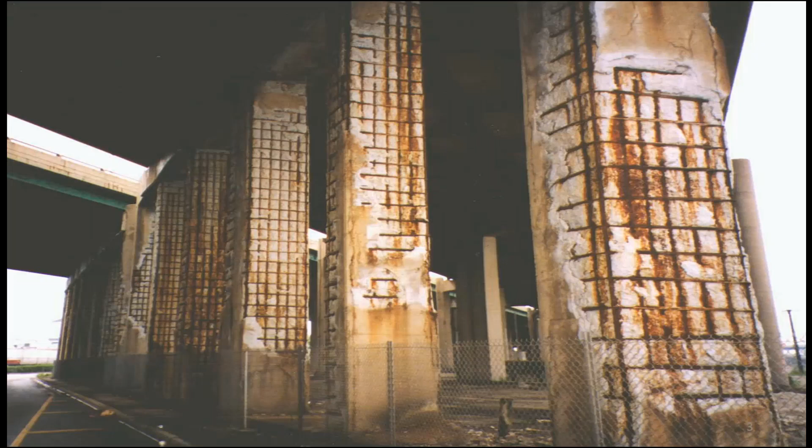So with that, we'll get going. I thought I'd start by showing a picture of a bridge. There are a lot of structures out there which suffer from deterioration, and very often those structures end up being demolished and replaced. That may not be the most beneficial option for either the owner, the traveling public, or society as a whole, but that does happen quite a bit.

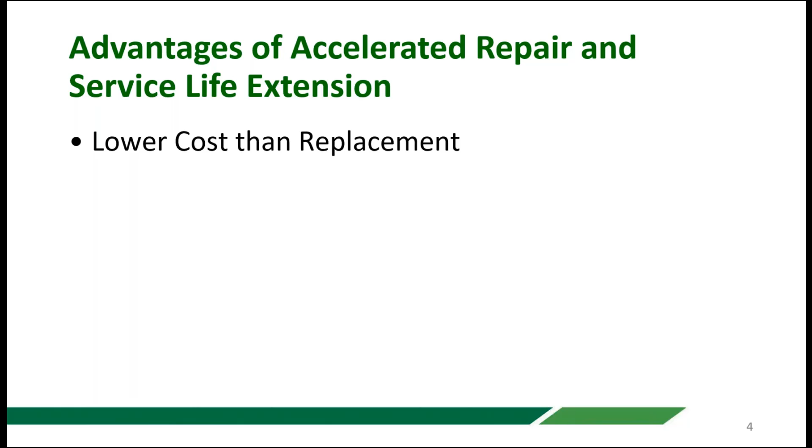There are a lot of advantages of accelerated repair and service life extension. This is not an inclusive list, but generally this is lower cost than replacement—if not, then probably you should do replacement. Generally it's faster than replacement. Generally there's much less impact on traffic and you have improved work zone safety. Often you have reduced environmental permitting, and you certainly use less material and as a result have a lower environmental impact. Finally, all of these things lead to improved public relations, and hopefully not only is the public happy, but so is the owner, contractor, and everyone else.

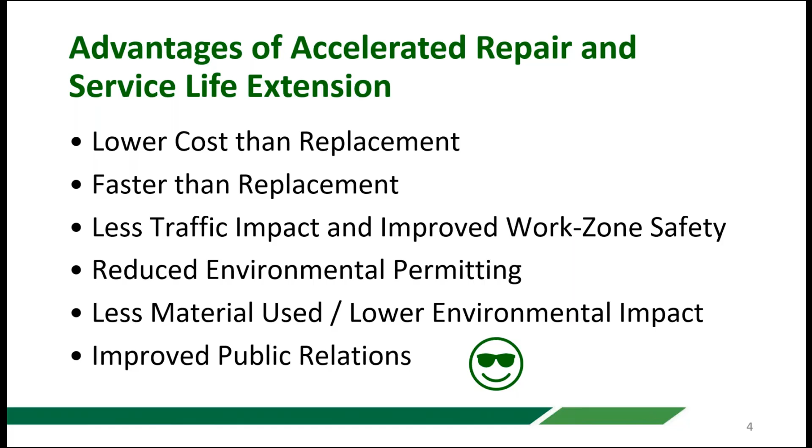In order to do this, however, we need to be able to do repairs that last. There are a lot of repairs out there that are done that are maybe not done very well, and as a result, they don't last. If you're counting on the repair to last, doing it poorly or not doing the proper things in order to make a durable repair is not good.

So this is a picture of a beam end on a bridge by a leaking joint, and you can see they've done some repairs. They haven't done many of the things that should be done in terms of detailing of the repairs, and the repair is obviously failing, very often after a short period of time.

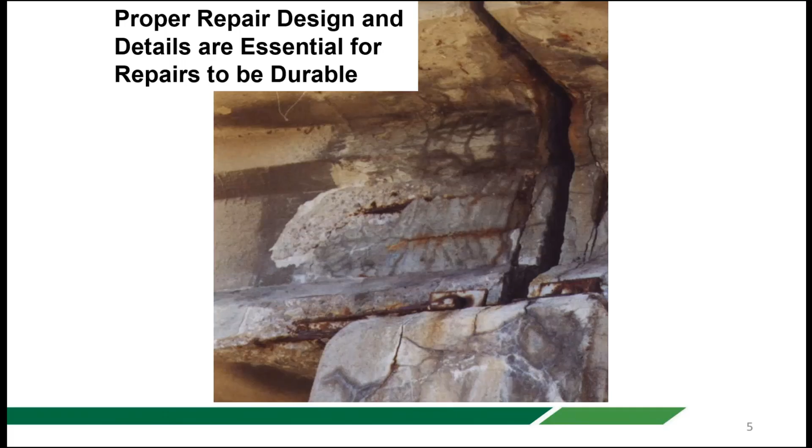There are organizations out there like the International Concrete Repair Institute, which produces and has available a number of different guidelines and procedures for doing different types of concrete repair steps. This document is specifically related to how to do proper concrete repairs. ICRI, the International Concrete Repair Institute, is part of the National Concrete Bridge Council, so you can access a bunch of their documents.

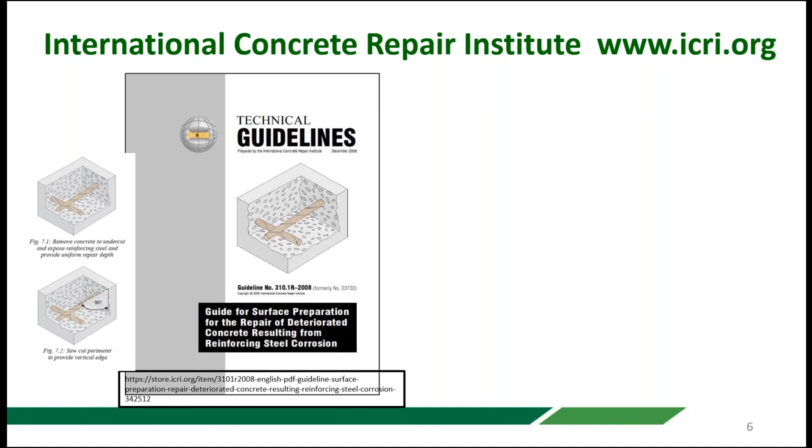In this document, for example, it talks about how you should have square cut edges, chip in behind the reinforcing steel, and a number of other things in terms of surface preparation and getting a nice, clean, rough, sound surface to bond to.

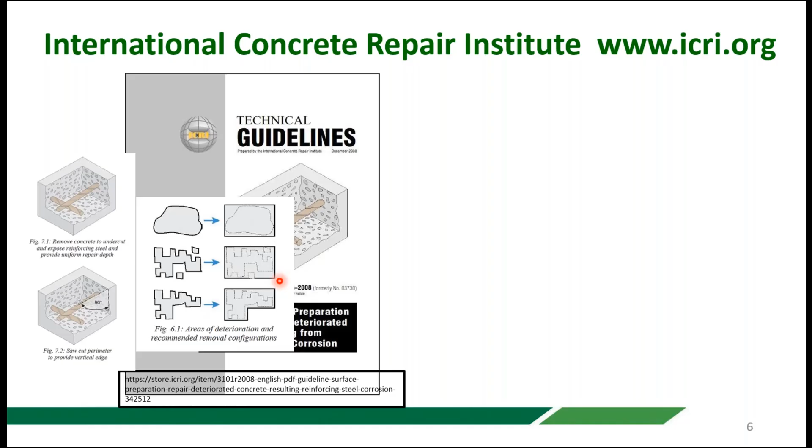And even things like the shape of the repairs, instead of doing ragged shaped repairs just to follow around the area that's damaged right at the moment, you're much better off, as outlined in this document, doing nice rectangular or square shaped repairs. You'll have a lot less issues with cracking, and a lot better quality control and durability. A whole bunch of these things are outlined in these documents, and I highly recommend using that.

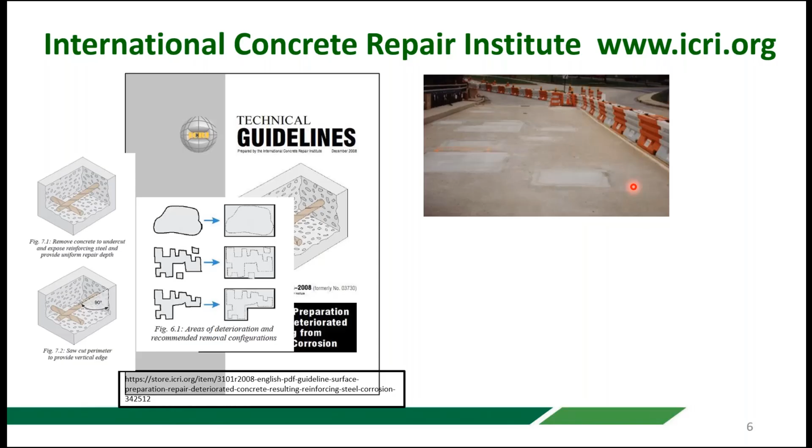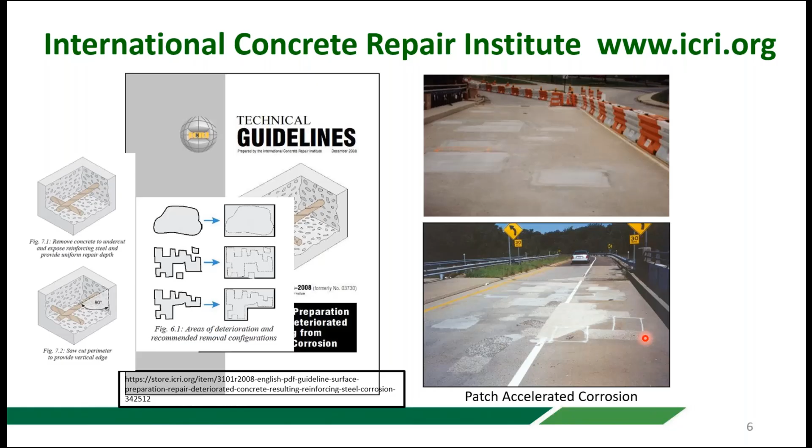But the issue is, if you do good quality repairs, you can make the repair itself last, but that doesn't mean the overall structure is going to last, because even with good repairs, the area adjacent to the repair can continue to corrode, and you end up going out and doing more repairs, then come back and do more repairs. We refer to that as patch accelerated corrosion. So even though the repairs themselves might be done well, you can still have an ongoing corrosion problem that causes a maintenance issue.

Why does this happen? Well, it happens because when we do a repair on a deck or a column or a beam, we remove a section of concrete and replace it with chloride-free concrete, but we leave chloride contaminated or possibly carbonated concrete around the perimeter of the repair. Over time, the corrosion will continue, or in some cases even accelerate, in the immediately adjacent area where you've left chloride salt contaminated concrete.

That happens because you have different potentials, or essentially voltages, in the steel, which result from the environment around the steel. Where you have salt contaminated concrete, you may have a potential of something like minus 350 millivolts, whereas in concrete without chlorides, you might have a potential of only minus 200 millivolts. There's a voltage difference, and the area that's more negative is always the area that's going to corrode, pushing current to the area that's being protected by the corrosion. That's the mechanism that happens in the background.

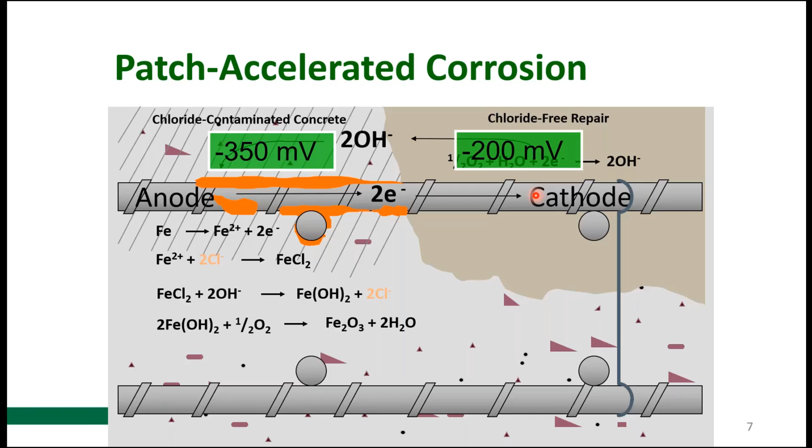We can address that mechanism locally by putting a galvanic anode into the repair. Even though we still have chloride-free repair concrete and chloride-contaminated concrete surrounding it, this will either slow down or completely stop the corrosion, because this anode will have a corrosion potential that's much more negative, something around minus 1100 or minus 1000 millivolts. That's more negative than the steel in the chloride contaminated concrete or the steel in the repair itself. So current is going to flow from the anode to the steel, and the steel is not going to corrode as a result.

That's just because you've got these voltage differences, and the most negative thing is what's going to corrode, and current's going to go from the more negative thing to areas that are less negative, as indicated here.

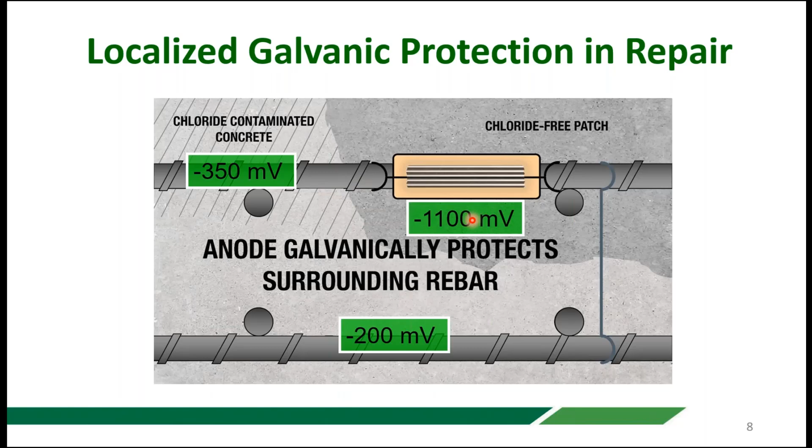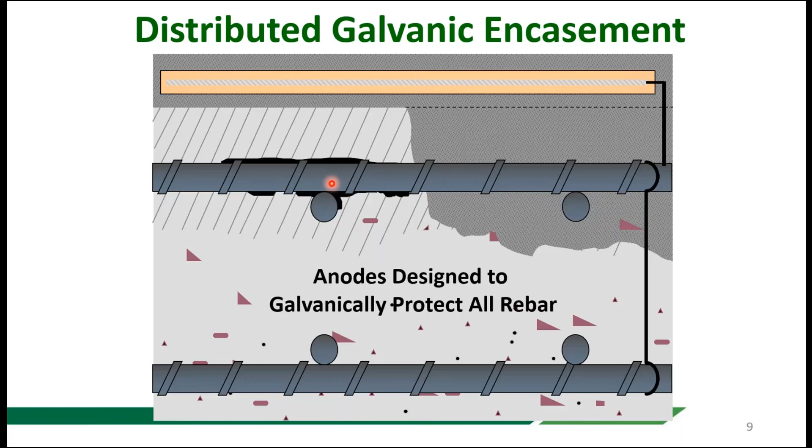Now, in terms of a galvanic encasement, we're doing very much the same thing, except on a distributed or a kind of global, or at least area basis. So instead of just having a single anode to protect a very localized area, we have a distributed anode that might be applied over the whole structure or section of the structure. That anode is passing current to the steel, even in areas where you have salt contaminated concrete remaining. That steel is protected and will either stop corroding or corrode at an insignificantly slow rate in the future. So that's the concept behind a galvanic encasement.

Just to illustrate before we get into the project examples, on the left-hand side here you see an example where you have localized galvanic protection, some local galvanic anodes installed along the edge of repairs, joint repairs, and concrete repairs on a bridge deck. On the right here, we see a galvanic encasement. During installation, you have galvanic anodes, these vertical strips, applied over this whole area for our New York State DOT. One is localized protection, the other one is more global, or a whole area that has been identified to be protected.

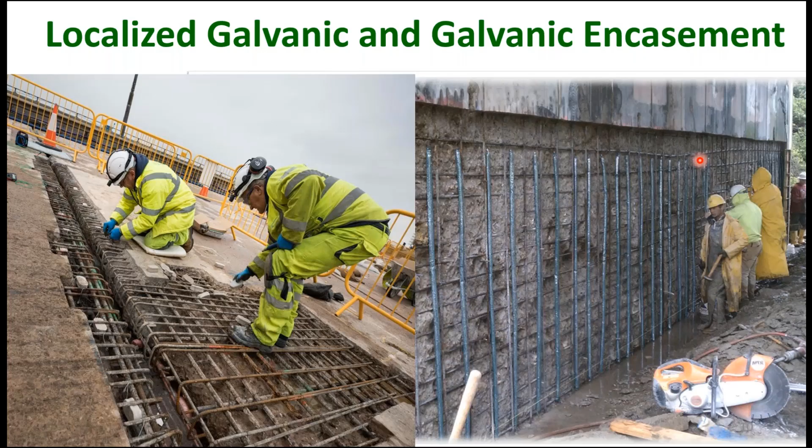One other thing I wanted to touch on before getting into the case studies is that I had the really good fortune about 15 years ago to be involved in a research project, a Strategic Highway Research Program, SHRP2, project called R19A, which had to do with design of bridges for service life, specifically for service lives beyond 100 years. I had the good fortune to work with Atarod on that project and a number of other really good people.

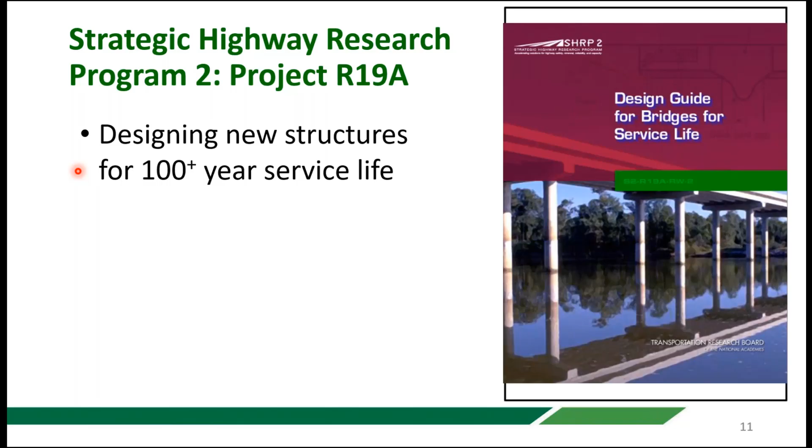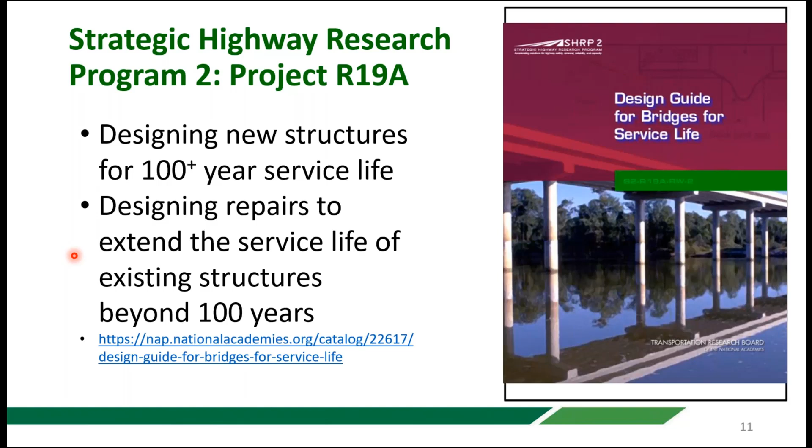I'll refer to it in a couple places during the presentation. But we're going to focus on this second point, which is how do we design repairs to extend the service life of the structure to whatever age we want. When we talk about repair design, it all depends on what's the condition of the existing structure and what are you trying to achieve.

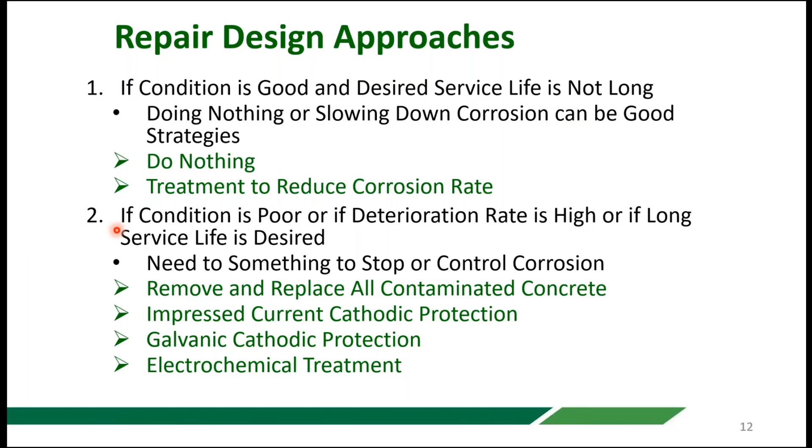So in very, very simple terms, if we break down what's in R19A, for existing structures, if the structure itself is in good condition and the desired service life extension is not too long, you might not even have to do anything at all, or maybe you can do a treatment like a coating to keep the concrete drier to slow down the corrosion rate. That is certainly a possibility. But if the condition of the structure is already poor, or if the deterioration rate is already high, or if you want a really long added service life, then you probably, in most cases, need to do something more significant than doing nothing, or maybe putting sealer on the concrete.

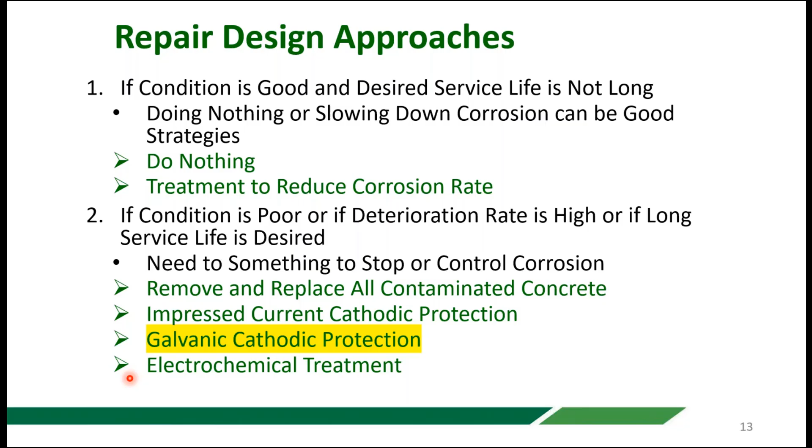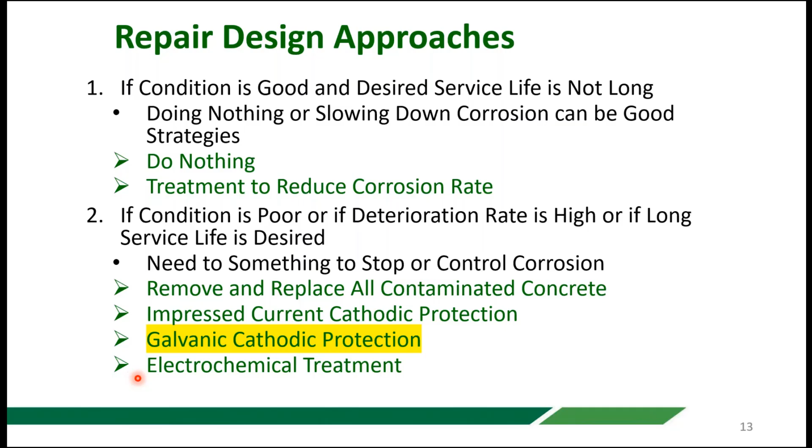It may involve going in and removing and replacing all of the existing chloride contaminated concrete, for example. It could involve using some form of cathodic protection, either impressed current, where it's a powered system, or galvanic, which is obviously where you use galvanic anodes of some form. That's what we're going to be talking about today. Or it could involve using some form of electrochemical treatment like chloride extraction or realkalization for carbonated concrete. But you probably need to do something in order to get the service life, because otherwise the structure is going to continue to deteriorate, and that won't get you to where you want to be.

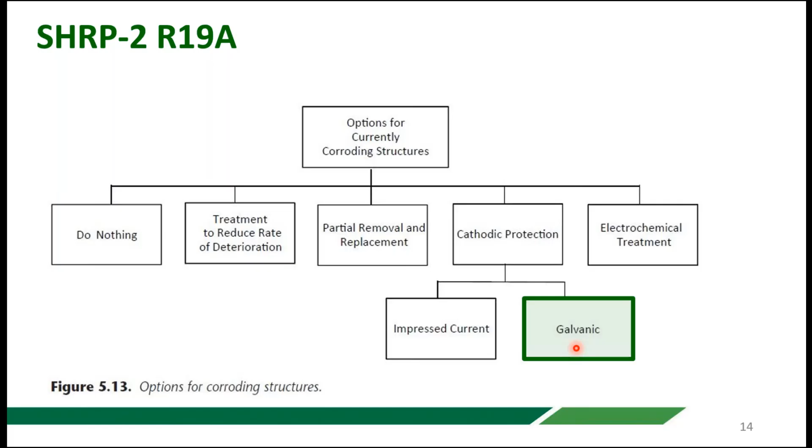There is a graphic in the R19A document, that I showed you the link to, that specifically relates to options for bridge structures that are already corroding. It's a little flow chart that highlights those options I showed in the last slide. So if it's not too severe, you're kind of on the left-hand side of the chart. As you get more severe, you probably move to the right, or at least you look at the options that are more on the right. The option we're going to be talking about today in these examples is using galvanic cathodic protection. That's where you don't have an external power supply. You simply have some form of galvanic anodes that are installed and connected directly to the steel.

Okay, so into case studies, examples. I thought I'd start with a case study example that is actually in the R19A report. This case study is on a deteriorated bridge abutment. It's actually a whole series of bridge abutments, but what's illustrated in R19A is a single abutment.

Ohio DOT, which was the owner here, wanted to extend the service life of these abutments because they had put new decks on these bridges a few years before, and they hadn't done anything to address the substructures. They thought they were good enough at the time. Now the substructures were in bad shape, and they had a bridge deck on top that had a lot more life left in it, so they wanted to deal with the substructure.

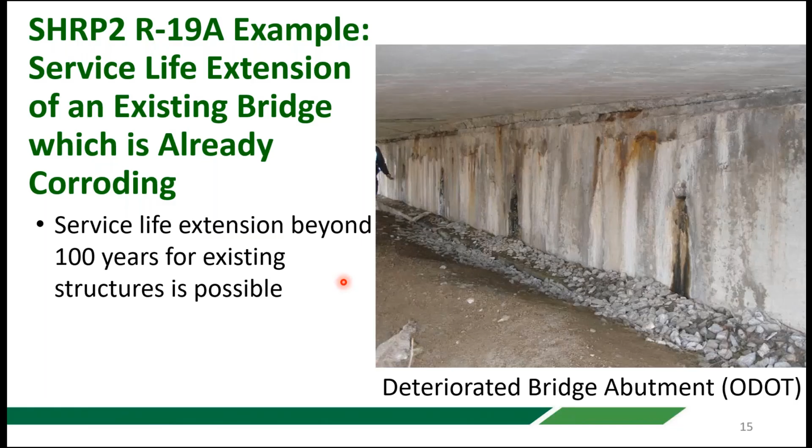As outlined in R19A, it is certainly possible to extend the service life beyond 100 years. There's no issue about that. But you do need to consider the existing condition. You need to consider the existing materials, their physical condition, their degree of contamination, the condition of the reinforcing steel in there, and you have to consider it as a whole in order to have a holistic design.

Here's a picture of the first abutment, and you can see that it's clearly exposed to a leaking deck joint and chloride contamination. There's cracking, may not be completely spalled, but these chunks of concrete all along the edge here are loose, and it's clearly not in good shape.

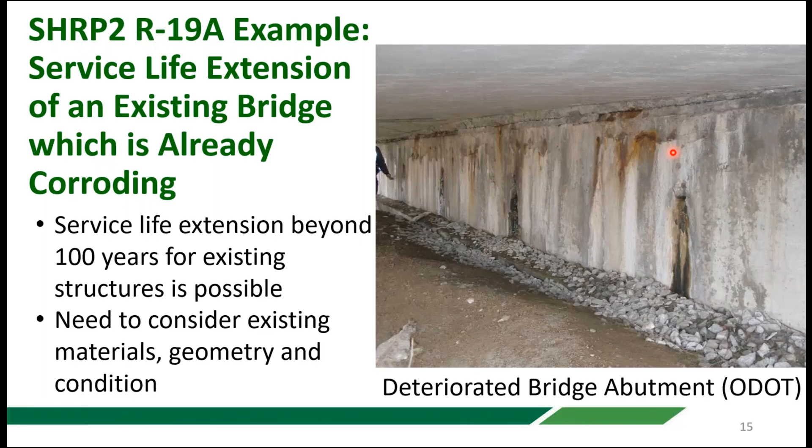The solution that Ohio DOT did, this is a job that was done back in 2005. Basically, I'll show you through a series of pictures, but they essentially removed the existing cracked and damaged concrete that you could see in the previous photograph, and they put a new layer, 6-inch thick layer of self-consolidating concrete over the entire face of the abutment with new reinforcing steel and dowels.

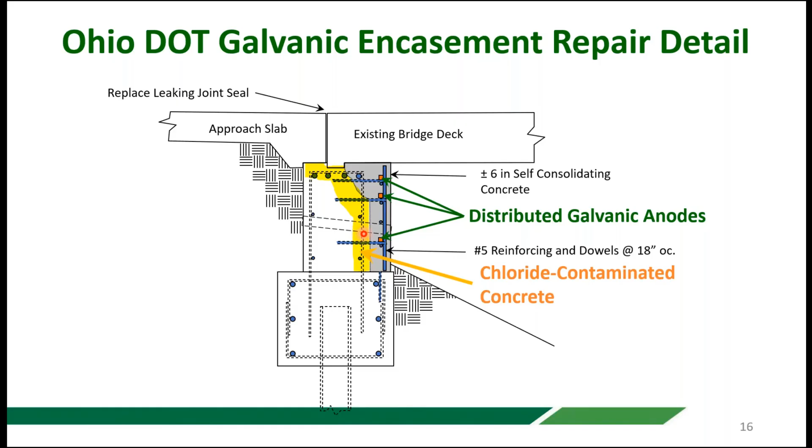Just to walk you through a few photographs, you can see the steps. The first step was to go and remove the existing cracked, delaminated and spalled concrete. You can see that has been removed, mostly at the top edge where you can see all the damage in the previous photo. They did not remove all of this salt contaminated concrete down here, behind the cracked section, because they're still relying on it to carry the load of this bridge deck.

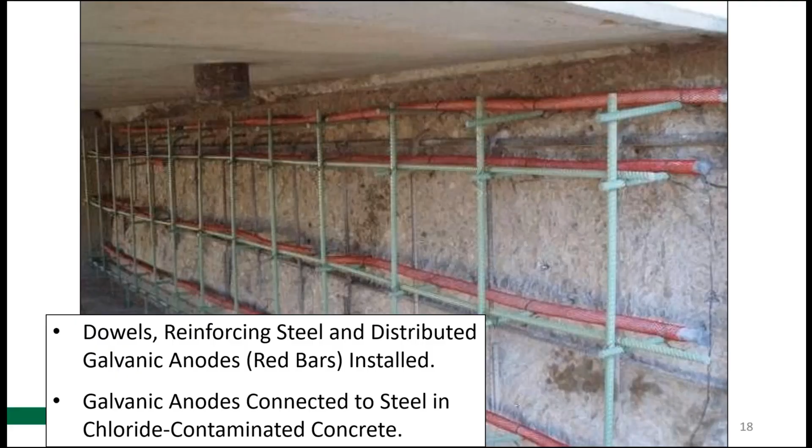They then went and put in dowels and a new cage of reinforcing steel, and the galvanic anodes in this particular case are these red bars here, here, and here, distributed along the whole section, and those anodes are electrically connected together. You can see the wires here, and the wire goes from this to connect to the steel in the existing structure.

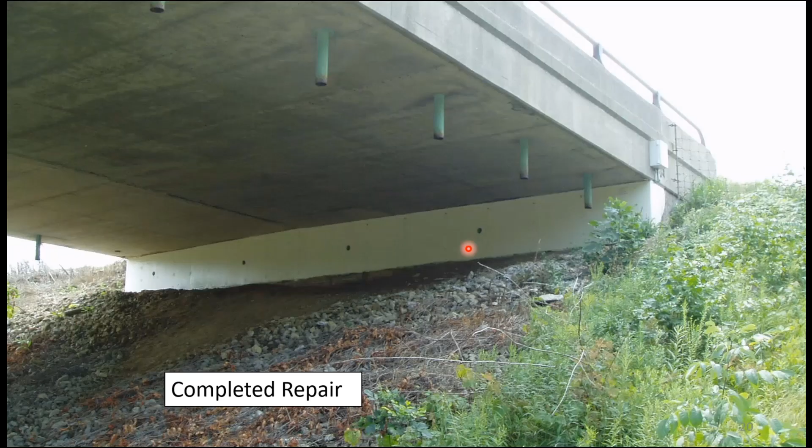They then formed the front face of the abutment, and because this was at the time the first job of this type that they had done, they put in some monitoring stations so they could monitor the performance long term. The concrete was poured, and now here you can see the completed repair. The forms have been removed. Essentially a new concrete facing on this wall, but inside that concrete facing are the galvanic anodes that are connected to the steel inside, and this monitoring box here allows the owner or us to be able to go back at any time in the future and take measurements.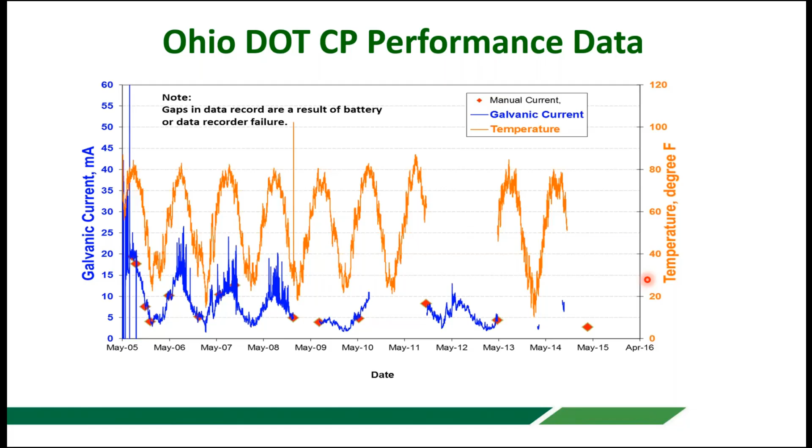But you'll see that it doesn't go to zero even in the middle of winter. Even though the temperature is getting below freezing, it's still actually passing current to the steel. And probably more important than all of this is that they have been monitoring since 2005 a parameter called polarization, which is the main thing you measure to determine if a cathodic protection system is working or not.

The NACE, National Association of Corrosion Engineers, standard for cathodic protection is that the polarization needs to be 100 millivolts or greater. If it is, you can sleep easily knowing that the steel is cathodically protected and not corroding. The polarization for this structure has been well over 100 millivolts from 2005 up to over 17 years, and continues to function.

The other thing they can monitor by tracking current flow over time is how much additional life, how many more years you have out of the anodes. Based on their monitoring, they're going to get an additional 35 years of service life from the anodes put into the abutment. So that's one example, and I just used that—it's quite a small job.

Ohio DOT has now used that same technique on over 30 projects, using it regularly on some very small bridges and some bigger ones. I thought it would be interesting because it goes back to the SHRP2 R19A project.

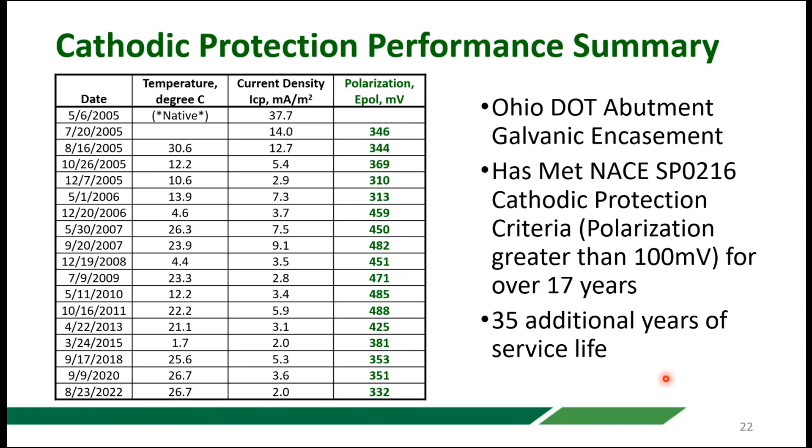The next project I wanted to show you is the Ministry of Transportation of Ontario, which did a series of rapid bridge replacements starting in 2007. The first one was in 2007, and the last one was done in 2012 up in Ottawa, Canada.

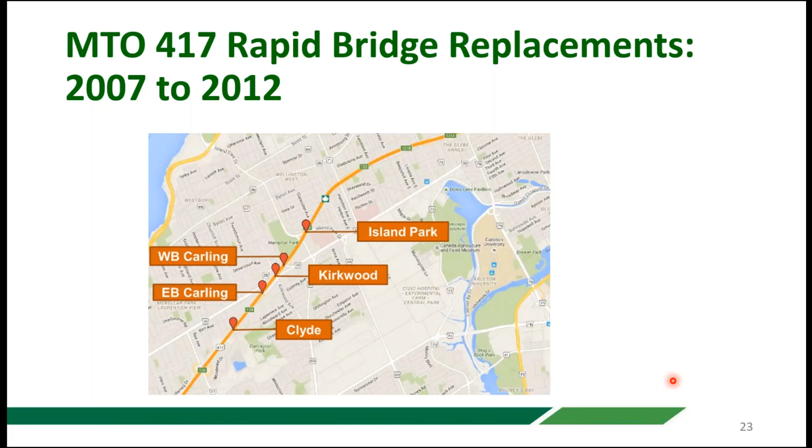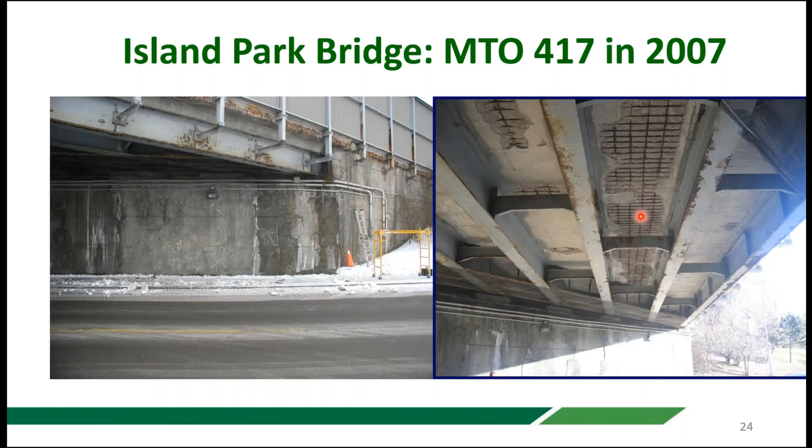Basically these were bridges—the expressway is up here, and these are all underpasses underneath the expressway. You can see, similar in a way to the Ohio job, signs of leaking joints, and the concrete abutments and wing walls are not in the best shape. The deck of this structure is not in good shape either.

For the substructures, they used a galvanic encasement—this was the first job of this type that Ontario Ministry of Transportation did. They went in and removed any delaminated concrete. You see localized areas where the reinforcing steel has been exposed. They roughened the concrete surface and put in dowels, and they're going to put in a new cage of rebar.

They're going to put in the anode, similar to the previous example, then form and pour the abutments and wing walls back, but leave them in service because traffic is on here during this whole process.

So each of these two bridges was replaced in a 16-hour road closure, and they dropped the new ones in place on the substructure that at that point had already been completed.

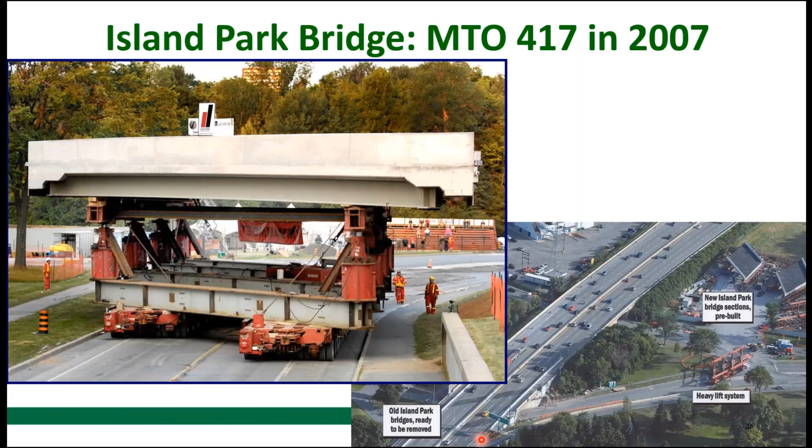Here you can see a picture of the rehabilitated or reconstructed structure. This section up here is new—that's the new deck that was dropped in, and the abutments and wing walls are the original old structures that were rehabilitated using galvanic encasements on both sides.

Ontario did this series of structures using rapid bridge replacement, and they have continued to use the galvanic encasement technique for substructure repairs in a number of other projects as well.

Okay, let's move to a completely different kind of structure. This is a tunnel project.

This is a project that's actually going on in Montreal right now. The first phase of the project, the first tunnel, is actually two parallel tunnels that go from the city of Montreal underneath the St. Lawrence River to the South Shore. It's the most heavily trafficked tunnel in Canada. The pictures I'm going to show you are from the first tunnel, which they finished the work on earlier this year, and they're just switching over to start the second tunnel this winter.

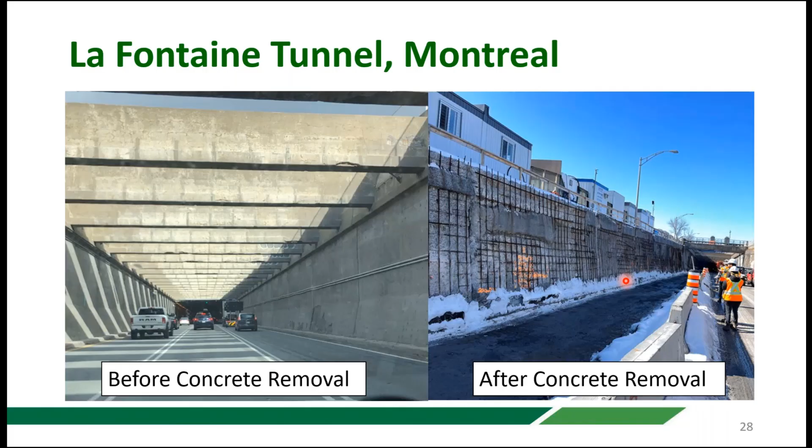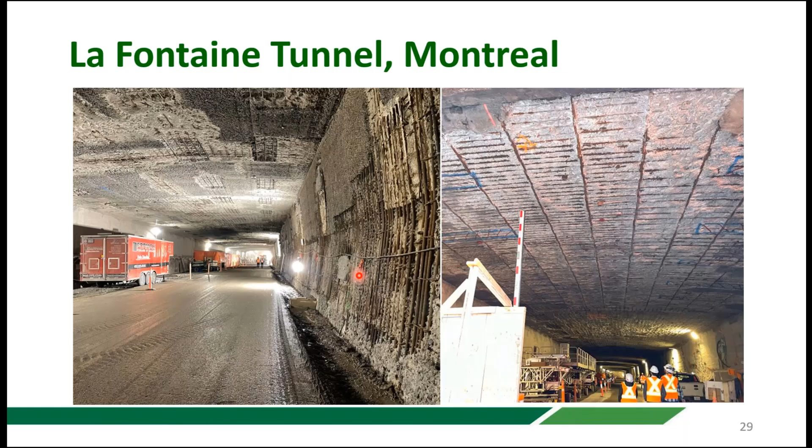Down inside the tunnel, here you can see a couple of images, obviously after the roadway is removed, and the tiling from the walls was removed, and they've done some surface preparation. It's not in the greatest condition, and all of the issue here is chloride-induced corrosion because of salt spray, because the cars and trucks going through here just create a salt mist in the air that settles on all the surfaces.

On this particular project, they're using galvanic encasements for the walls, which I'll show you a couple of photos of, as well as for the underside of the ceiling, the roof of the tunnel.

The photos you see right now on the left show one of the wall sections after the hydrodemolition is done. You can see the prepared concrete surface. In some places, the outer layer of reinforcing steel is exposed. In some other cases, it's not.

They're putting in dowels and a new cage of reinforcing here. These are the anodes in this case - there's one there, there's another one there, here's another one down here. They're put in on a grid pattern over the wall area.

They're using these massive forms, and they're basically forming a 100-foot long section of wall all in one go. They have hydraulics and a rail on the bottom for moving along the length of the tunnel. They set them in place, and then they pump the self-consolidating concrete in behind the form.

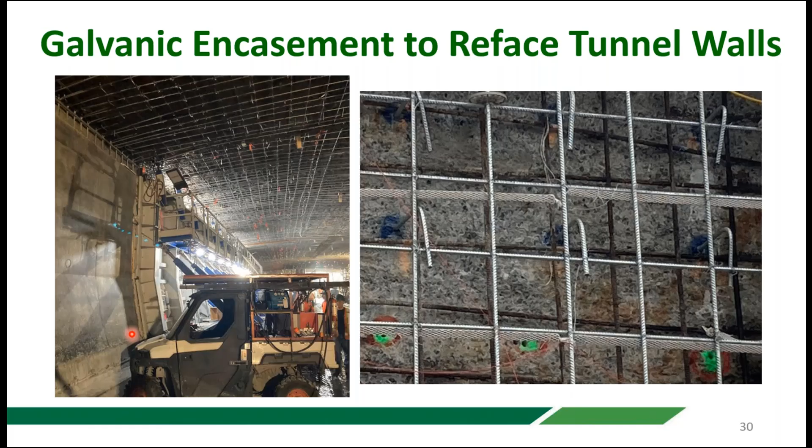On the ceiling, they're doing basically the same thing. After the hydrodemolition, they're putting up new reinforcing steel and dowels. You can see the galvanic anodes installed here, one here, one here, one here, essentially on a grid pattern.

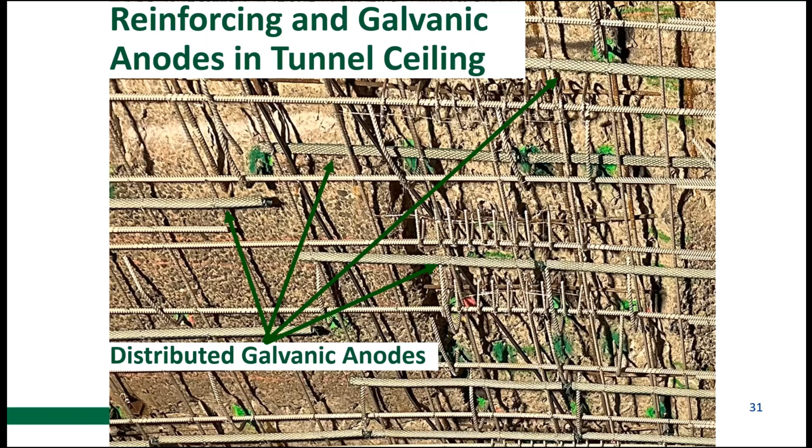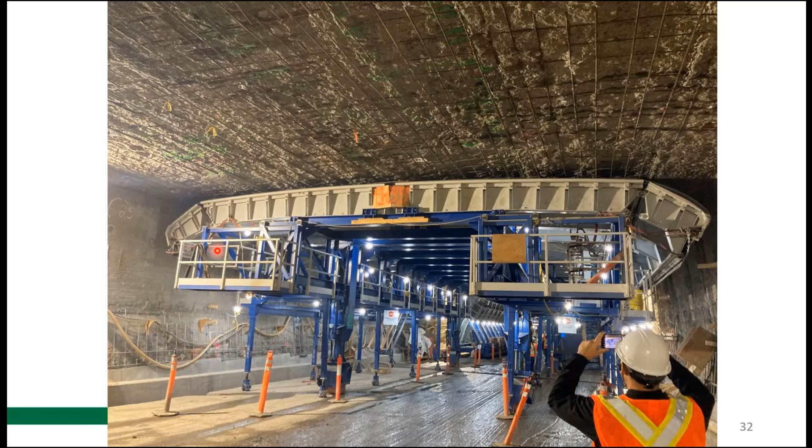They basically pump those repairs as well, and then obviously they just keep moving along down the tunnel, 100-foot section at a time.

Here you can see a completed section of the tunnel. All of the concrete work for the walls and the ceiling is done. You have a new concrete surface for the walls and a new concrete surface for the ceiling. As with the two previous examples, the galvanic anodes are buried in this new concrete wall and underneath in the roof. The purpose of those anodes is to protect the steel that remains in the salt-contaminated concrete, to keep that from corroding for the design service life.

Obviously, if they went in and removed all of the chloride-contaminated concrete, they wouldn't need to do any galvanic or impressed current cathodic protection. But based on my discussions with the engineers, the issue was if they removed that much concrete, the tunnel section wasn't structurally stable anymore, so they had a huge structural problem to deal with.

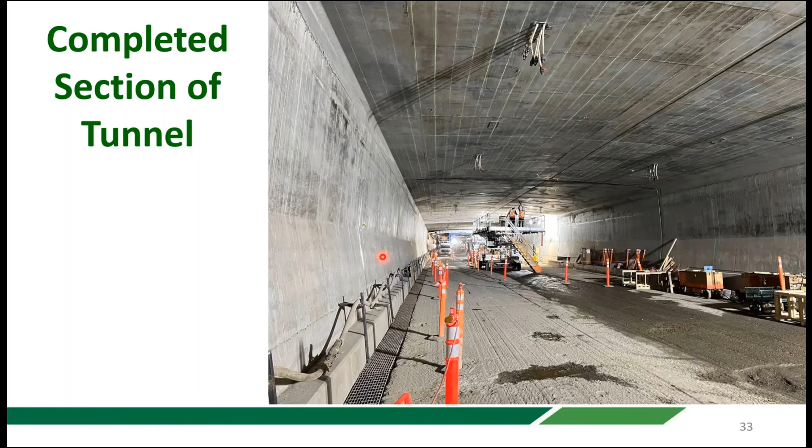Now I'd like to move to the last case study today, a project in Toronto called the Gardiner Expressway. It's owned by the City of Toronto, and it's a very heavily trafficked, elevated expressway that goes through downtown Toronto. I'm going to show you two videos to lead into this that were produced and published by the City of Toronto.

I have to give the City of Toronto huge kudos for the amount of communication and transparency they've had with the public in terms of their issues and what they're trying to accomplish with this project. The first video, I'm only going to show you a portion of it because it's several minutes long, but you'll get the idea, and then I'll show you the second one, which is their strategy for the repairs. So here's the first video.

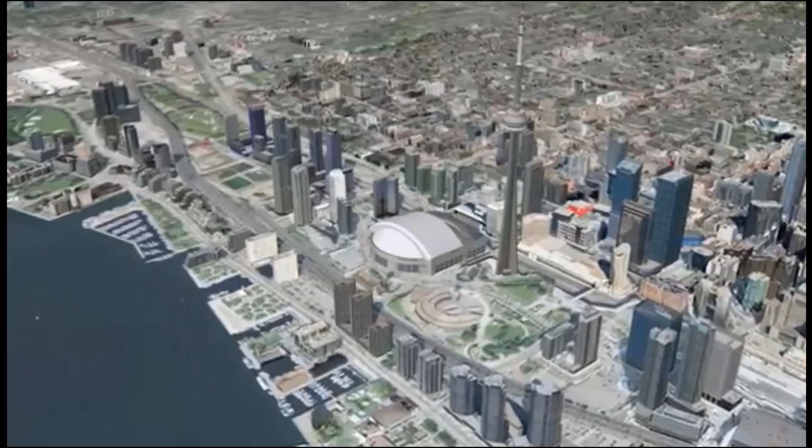Since 1958, over 60 years, the Gardiner Expressway has been a major transportation artery in our city, a vital thoroughfare for commuters, businesses, and the traveling public. This highway has been an integral part of our transportation network, critical to supporting the growth of our economy and a multitude of industries operating globally.

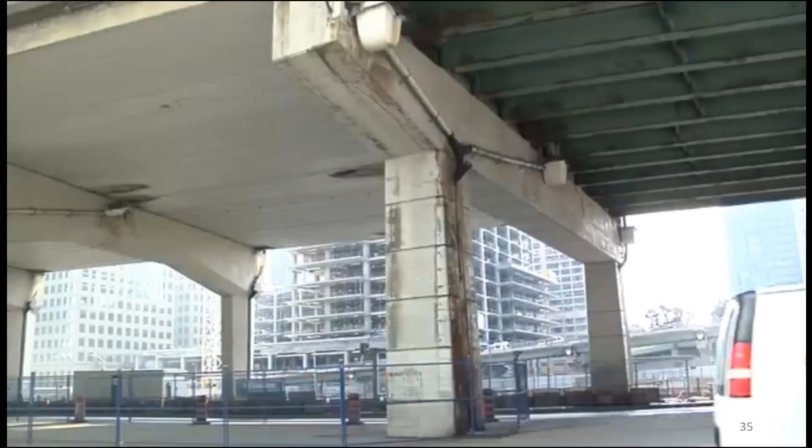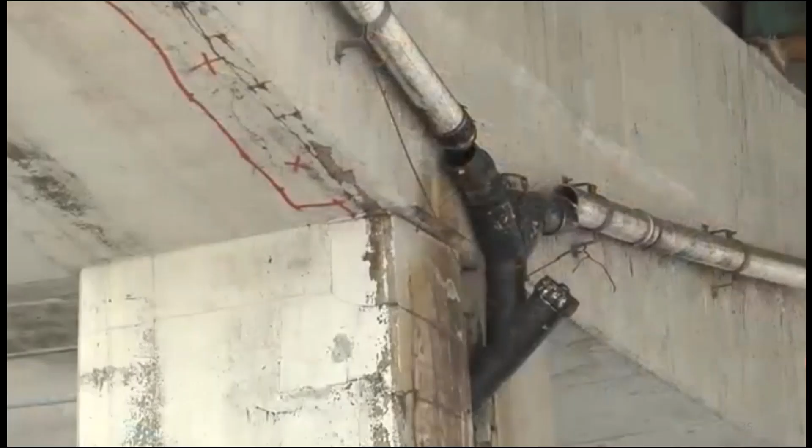However, as the structure ages, the bond between the surface layer of concrete and its reinforcing steel breaks down. As a result, incidents of loose concrete falling from the structure have increased in recent years. It's important to know that while the city is addressing this issue with proactive measures, such as removing the loose concrete and regular inspections, the expressway is structurally sound.

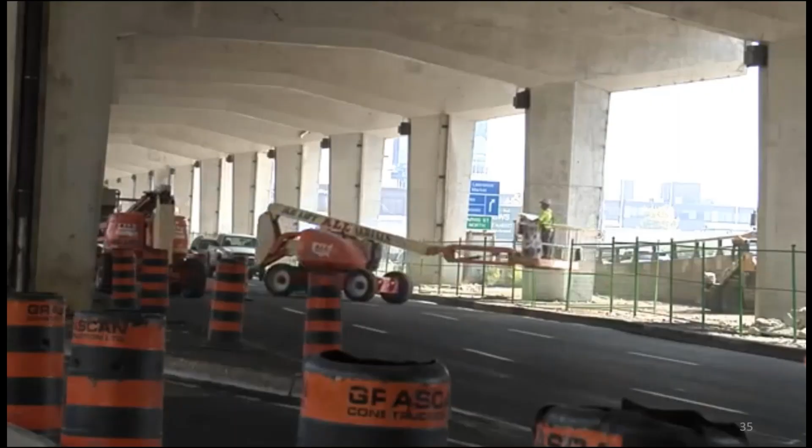Okay, so that's the first video, and that gives you a little bit of insight into the problem. And I'm going to show you the next video, which is their strategy for solving it. This is a public information video that they have, available on their website.

The Gardiner Expressway is over 60 years old, and the section between Jarvis Street and Cherry Street is nearing the end of its service life. This is the #1 priority and first project of the City of Toronto's Gardiner Expressway Strategic Rehabilitation Plan.

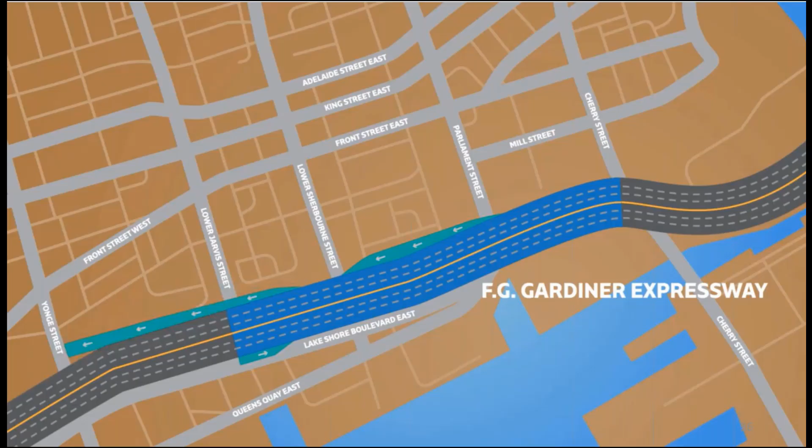What does this work involve? The entire concrete deck and steel girders of the expressway between Jarvis and Cherry will be replaced. The westbound off-ramp at Sherbourne Street and the eastbound on-ramp at Jarvis Street will also be replaced. And the westbound off-ramp leading to Yonge, Bay, and York Streets will be extensively repaired.

What does this mean for drivers? During construction, 2 lanes in each direction will remain open throughout the expressway work zone. There will also be full closures on the ramps in this area, however only 1 ramp will be closed at a time. From time to time, there will be closures on Lake Shore Boulevard outside of rush hours between Jarvis and Cherry Streets as crews work to remove and replace sections of the expressway deck above.

This major work is using accelerated bridge construction methods, and crews will work around the clock to complete this project as quickly as possible. During construction, please plan your travel in advance. Be patient, obey signs, expect delays, and consider public transit. Thank you for your patience during construction. You can learn more about this work on the city's website at toronto.ca/Jarvis to Cherry.

There, I hope you enjoyed those videos. And as I was saying, I don't know another owner that we've worked with that's been more transparent with the public in terms of the issues and their strategy going forward. The videos give you a background, but I'm going to show you a series of pictures here to show you the work that's actually going on.

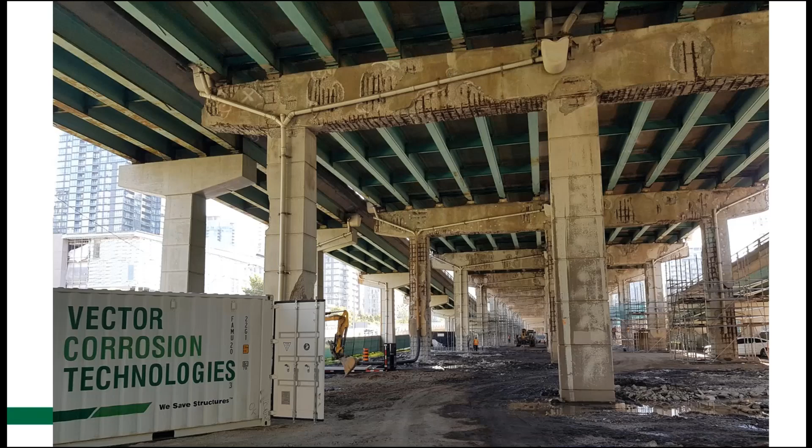So this is in phase 1 of the project that was referred to in the videos. Here's a picture of the pre-existing condition of the substructure units, and you can see that there's a lot of damage. This is before concrete removal. There's obviously delamination and spalling. You can see clear signs the joints have been leaking, and it's led to issues with the substructure. So these are not pristine, brand new things that are just being touched up. They're in fairly rough condition from a concrete point of view.

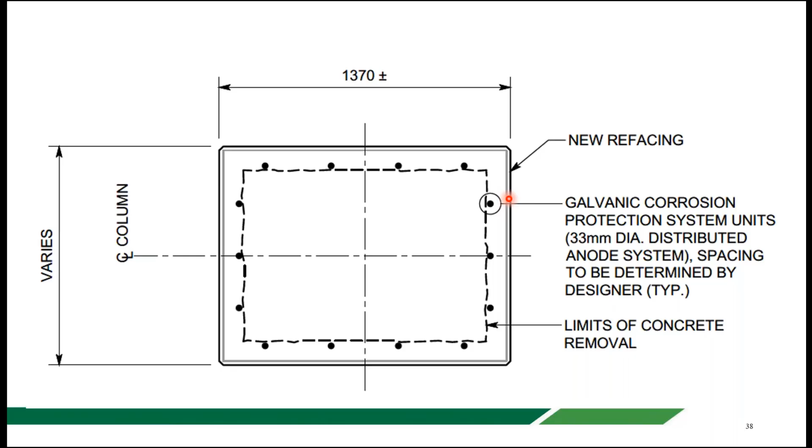They're putting some galvanic anodes in a vertical orientation on the columns and in a horizontal orientation on the pier caps. Then they're forming and pouring the concrete back to slightly larger than the original dimensions, but effectively they look the same as before when they're done. It's about 1/2 inch bigger in each direction.

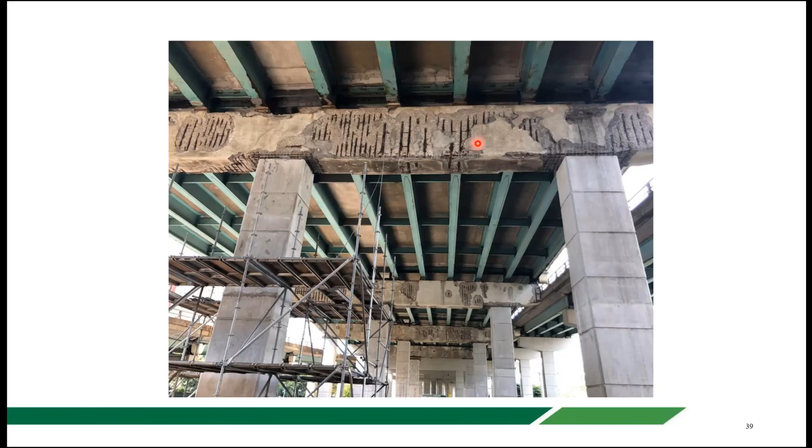On the caps, they're doing basically the same thing as on the columns. They're removing the existing concrete cover down to the reinforcing steel. They are putting some supplemental steel in where it's deemed required by the structural engineer. They're putting galvanized welded wire mesh for reinforcement in the overlay or encasement. The galvanic anodes in this case are the green colored bars spaced out here in the horizontal orientation. Then they're forming and pouring using self-consolidating concrete, section by section as they're doing the work.

There are certain staging requirements on the beams, but basically they're doing the full length of the beams using this method.

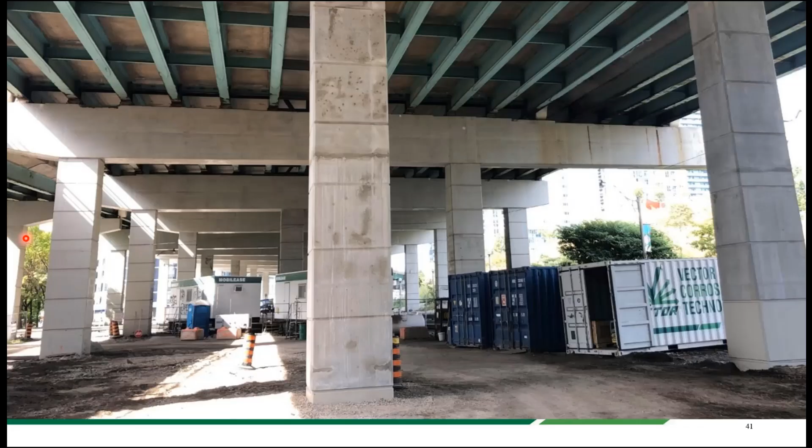Here's a picture of that first phase, the Jarvis to Cherry section, near the end of the work. Here you can see the columns and the pier caps are all complete, and the substructure work is finished or near finished at the time this photo was done.

That was an interesting project, and actually the second phase of this project has been bid and awarded, and the contractor is just getting set up to start the next phase, which is another section of this elevated section of highway. So that's, I think, the fourth case study.

I wanted to move from there and close the seminar by talking a little bit about sustainability and how doing the work this way is a sustainable practice. Obviously, if we keep structures in service longer, we have a lot of benefits. We talked about that at the beginning of the seminar, but we also reduce the demand for new concrete and other construction materials, and that is clearly a good thing. It's not necessarily easy, but it's certainly possible to do if we make it a priority.

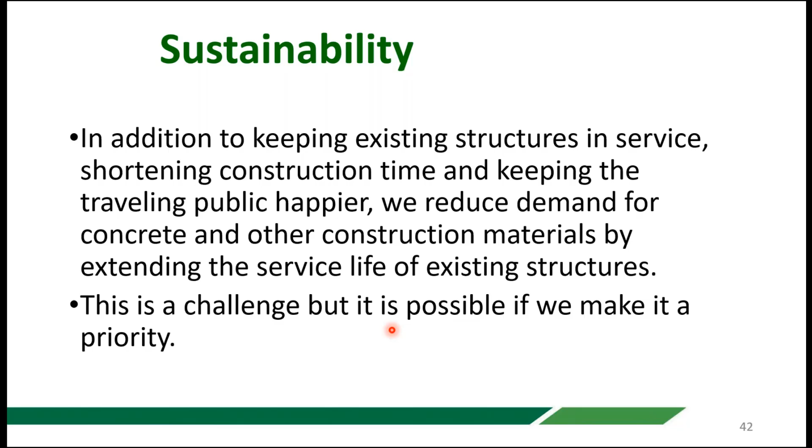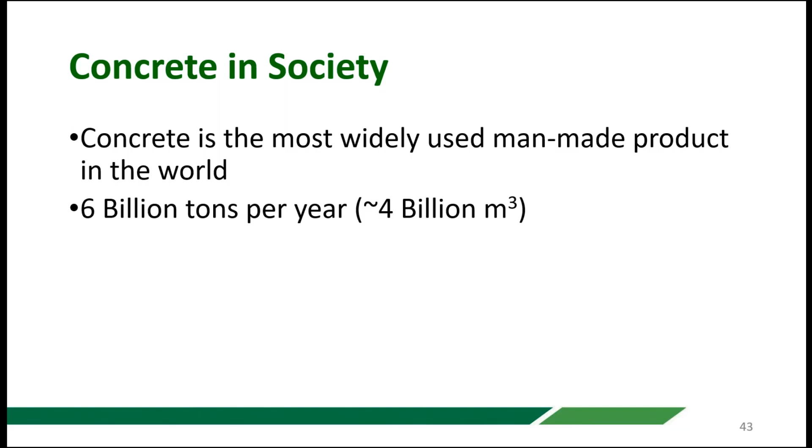And we can quantify these benefits, and that's what I'd like to show you in the next few slides. First, if we want to quantify things, we need to think about concrete as a whole. We make a huge amount of concrete in the world every year. It's the most widely used man-made building product in the world. We make about 6 billion tons of concrete every year. To make that volume of concrete uses a lot of raw materials and energy.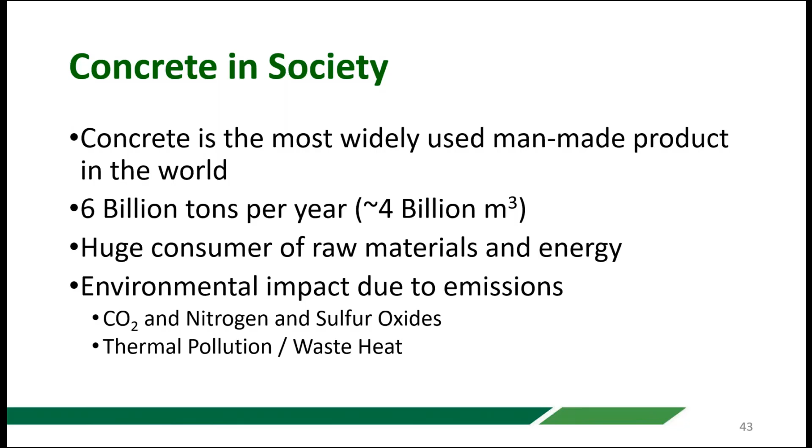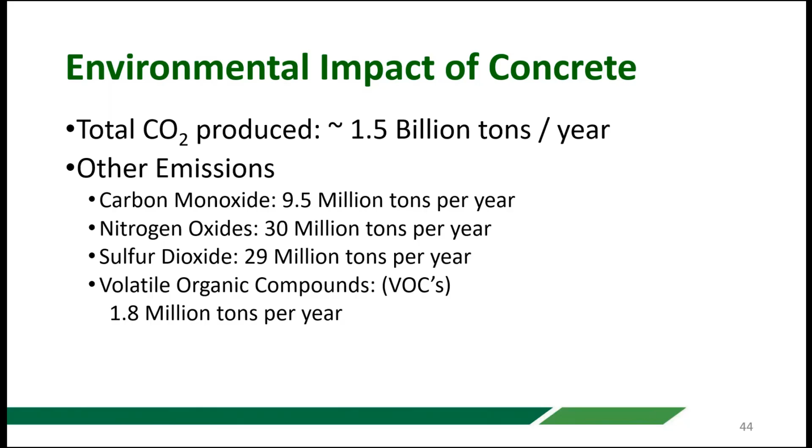Because we're making such a large quantity of concrete, there is a significant environmental impact that results from that, and that environmental impact can be quantified. Overall, to make 6 billion tons of concrete produces about 1.5 billion tons of CO2 every year and creates other emissions that can also be quantified. In addition, making concrete in large volumes results in direct thermal pollution, where we're dumping waste heat into the environment as well.

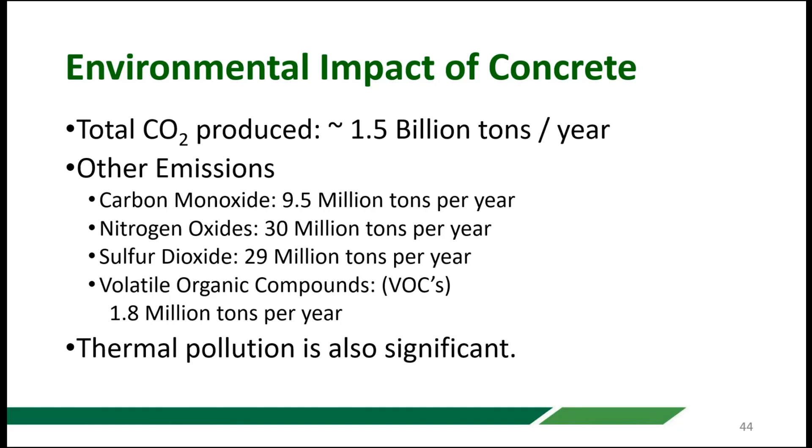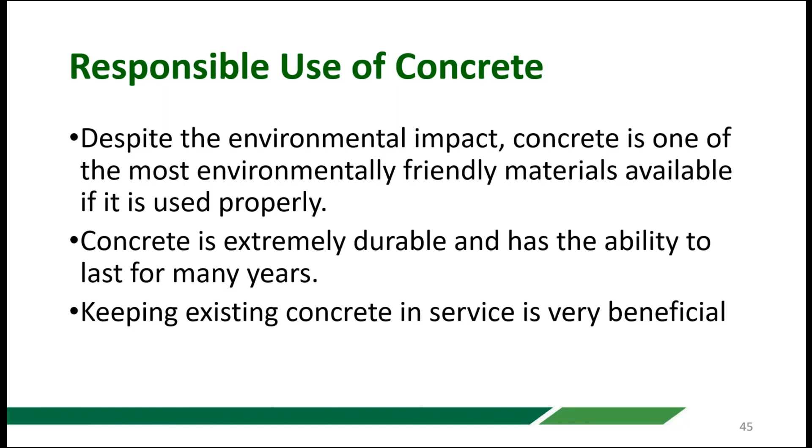I am not in any way saying that concrete's a bad material. In fact, concrete is probably the most environmentally friendly material we have available to us, but it needs to be used properly. Concrete has the ability to last for many years and be very durable. If we keep it for many years, its environmental footprint is much lower than that for steel or wood or these other building materials. But if we only use it for a very short period of time and then demolish it and replace it, concrete is probably not a good choice for those applications.

Just taking this last project that I talked about, the Gardiner Expressway project, we can quantify exactly what the benefit is that can result from doing this. First of all, you have an existing structure, at least for the substructure. They want a 40-year service life extension to the substructure. That's quantifiable. The substructure alone, just the substructure of that bridge, has over 70,000 cubic yards of concrete.

By doing this repair and service life extension project instead of demolition, 70,000 cubic yards of concrete was maintained in service and not demolished and replaced by another quantity of concrete, possibly the same quantity if the bridge was rebuilt using the same design. By not making another 70,000 cubic yards of concrete, the City of Toronto reduced their CO2 emissions by over 35,000 tons. To put that into perspective, that's equivalent to the annual emissions of over 7,000 people.

I heard at the beginning of the webinar there's 600 and something people signed up. The total annual emissions for more than 10 times the number of people on this webinar were eliminated by the City of Toronto's decision to extend the service life of the substructure of this bridge. These are quantifiable numbers and they do add up. This is a big job, but it's only one project out of many that not only the City of Toronto is doing, but think of all the other owners and agencies. The possible benefit here is very large.

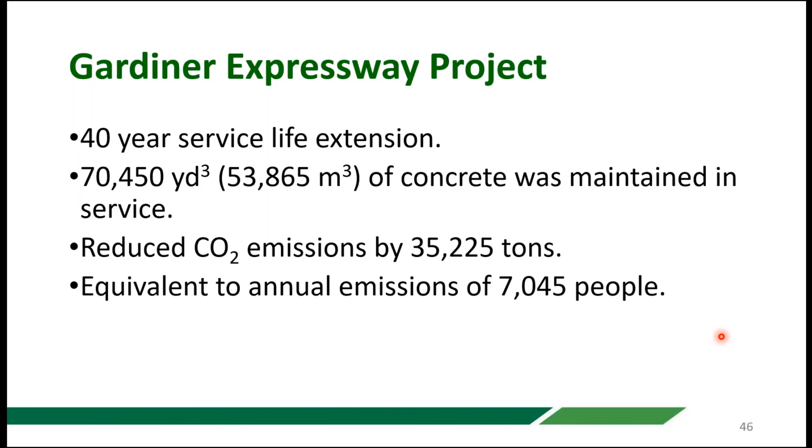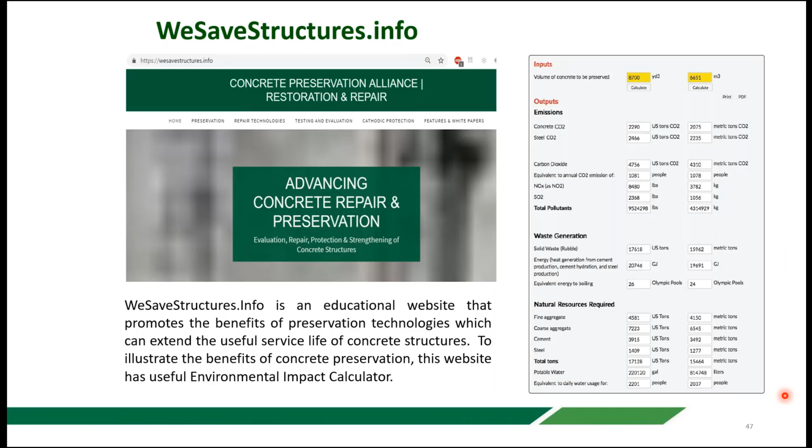If any of you are interested in quantifying these numbers for your own projects, you can go to wesavestructures.info. It's an informational website, and on that website there's a link to an online calculator. A screenshot is shown here on the right, and you can input the details for your structure in terms of the amount of concrete you're saving, push enter, and it will calculate the carbon dioxide footprint, the amount of concrete rubble produced by demolishing it, the amount of potable water used in the new concrete that would replace it, etc. All of this is quantifiable, and you can do it on your own projects as you consider things.

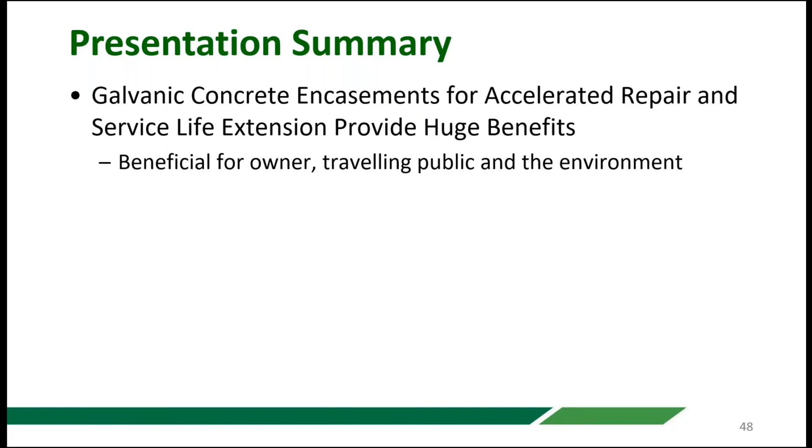So with that, I'd like to summarize, and first thank you for the opportunity to be here. Galvanic concrete encasements for accelerated repair and service life extension provide significant benefits. They're definitely beneficial for the owner, beneficial for the traveling public, and beneficial for the environment as well.

The repaired structure must, in most cases, continue to carry loads. That's one of the advantages of this technique. The repaired structure must last for the design service life—that's key. You need to define what service life you want, and then do your design in order to achieve it. You may need to do concrete repair, strengthening, or corrosion protection—all depending on your design—but you have to do whatever is required for a holistic design to meet your design service life.

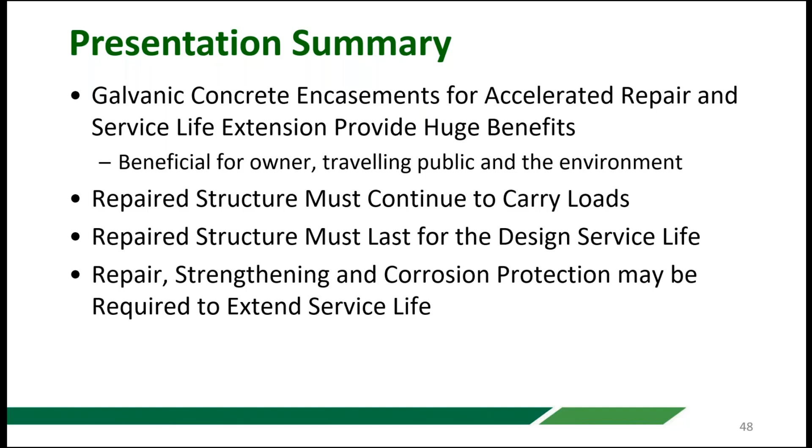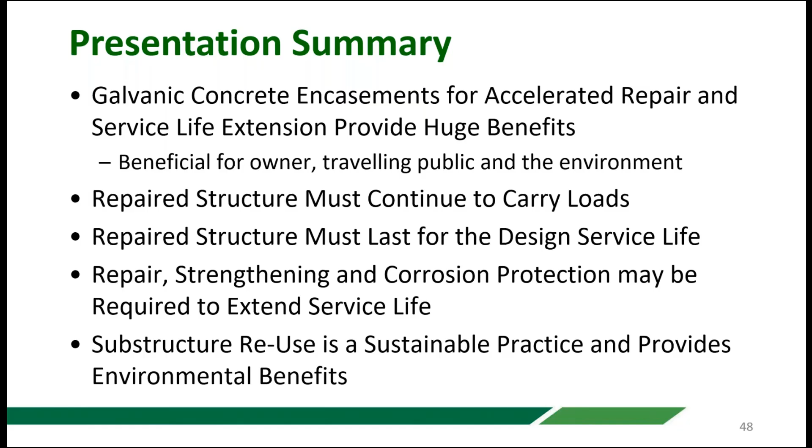So that you get the service life extension that you want. Finally, substructure reuse—but honestly, reuse or service life extension of any structure out there is a sustainable practice and provides environmental benefits. Thank you for your time today. It's a great honor to be able to present to this group, and if you have any questions, I'll be happy to answer them at this point.